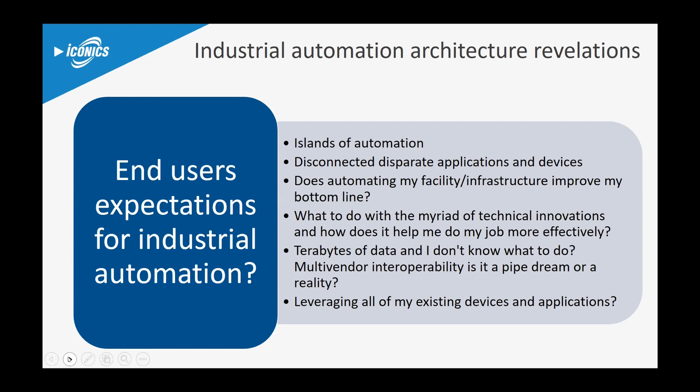Beyond digital transformation, I think about manufacturing overall. We talk about Industry 4.0, and it's important to understand where it came from. The first revolution was the Industrial Revolution, focused on mechanical aspects. The second stage was about doing more automated things, like assembly lines. The third revolution was my favorite - when we started thinking about programmable logic controllers, doing automation in discrete and process through an industrialized computer known as the PLC. The fourth revolution, which has the largest momentum, is essentially what's going on with Industry 4.0 and all the regional equivalents.

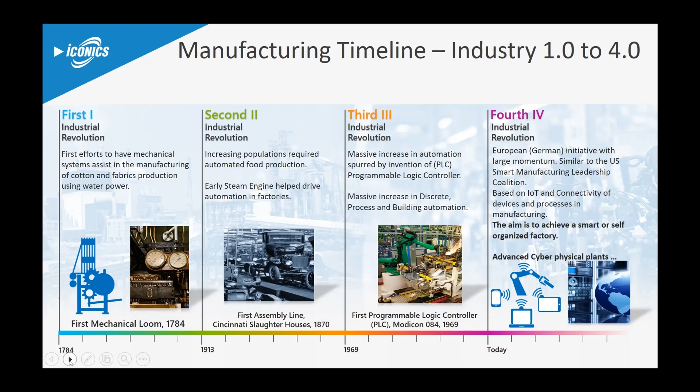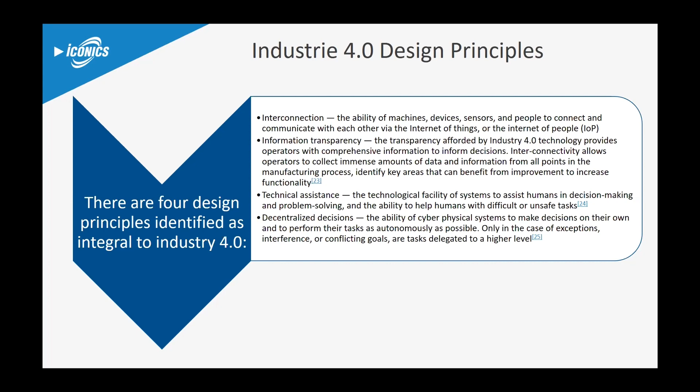The aim of Industry 4.0 and the whole industrial revolution is to achieve a completely smart, self-organized factory. There are basically four design principles that make up Industry 4.0: interconnectivity, information transparency, the ability to have technical assistance helping humans in decision-making and problem-solving, and decentralized decisions - allowing separate cyber-physical systems to make their own decisions, achieving significant automation as we approach IT/OT convergence.

In factories over the years, there's always been a wall between IT and OT. But now IT really needs to get data from OT. What we're seeing is a whole concept focused on IT to OT convergence - the ability to take data from OT and translate it into useful information for the IT world.

There are a lot of things that go on in the OT world - from a connection standpoint, gathering necessary data from all the different devices and applications, then analyzing that data and using great products out there to convert it into what IT people understand to make useful decisions. And it's true that IT, after making those decisions, can push data back down into the OT world.

I'm pleased to have joined Iconics to focus on a lot of the things they've been doing and how Iconics has really been focused on delivering on this whole concept of the Internet of Things - managing devices, how they interact with the cloud, how they leverage all that data to make it useful information, and ultimately get insights to make better decisions and realize the new business value that this connectivity and data can give us.

One significant one I'm pretty excited about is work we've done with a major oil corporation - unfortunately I can't say their name - but they've leveraged all these different components, using OPC UA technology, to take Iconics' respective IoT products and HMI products and consume this data so they can push it up to Azure. This is a significant part of enabling them to have a complete automated process control system.

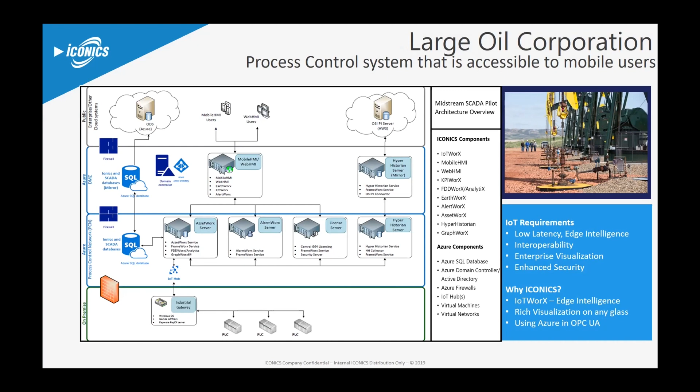So with that, what I'd like to do is turn it over to Jim, who's going to go through a customer success story and provide a good application of how we've been using and deploying digital transformation using both Iconics and Mitsubishi-based products.

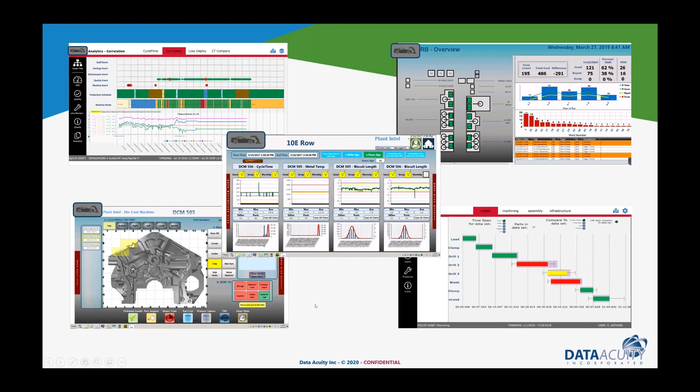So these examples are all in the automotive industry, but we've applied the same data structure, the same data analytics across many different industries. So if you're not in automotive, this certainly applies across many different industries.

The buzzwords manufacturing execution systems and the acronym MES tend to cover a lot of different automation disciplines. This includes OEE, or overall equipment effectiveness, alarm management, asset management, recipe management, product tracking, product genealogy, maintenance tracking, work in process, labor utilization. All of this ends up eventually getting pulled into these kinds of projects where we're analyzing data and looking for efficiency.

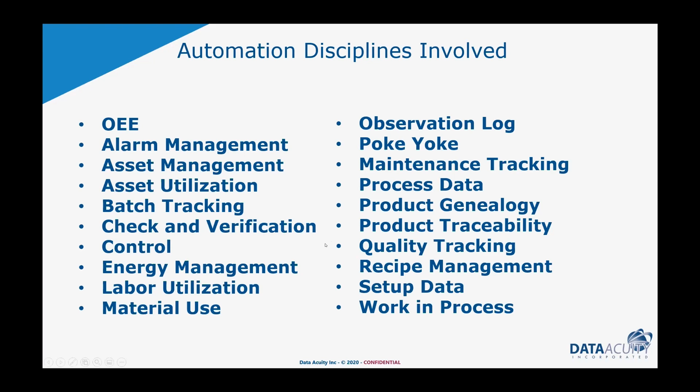For today, we're really going to focus on just a handful of those automation disciplines. We're going to start with how we applied OEE, overall equipment effectiveness. And the reason for that, just about every project starts with OEE, and we come back to it quite often, because that's the tool set, that's the measurement that allows us to focus our resources where their greatest need is.

We're going to talk a little bit about taking data from things like control systems, material use systems, quality tracking systems, maintenance tracking systems, and not just leaving it as data to be visualized, but in fact bringing it all the way to predictive availability, predictive maintenance, predictive quality, predictive material handling, and predictive performance by taking data analytics and bringing it up to predictive awareness. We'll talk about how we did that in some of these projects.

Again, we'll start with OEE, overall equipment effectiveness. The concept for OEE and the principles of how to apply it have been around for a long time. Most of you have probably looked at OEE at some depth. So OEE is availability, performance, and quality as a measurement of how efficient a given piece of equipment is.

Availability is defined as the operating time versus the downtime, and operating time happens to be not a 24-hour clock, but in fact what was the scheduled operating time. Performance is the speed or the quantity of product versus the design rate of a piece of equipment. Again, design rate is a little subject to interpretation, and we'll talk about that in just a second. Quality is good parts versus bad parts. That's pretty straightforward.

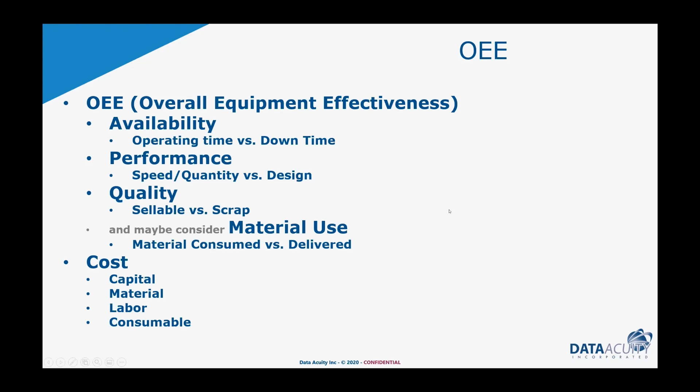If we're going to use OEE as a measurement, as a way to keep us focused on loss of efficiency, it's also important to keep into consideration that in addition to keeping high efficiency, we also want to keep low costs. So I can show you some ways of applying things like capital, material, labor, and consumable costs on top of the efficiency. We're not going to spend a lot of time on that today, but it can be worked into the equation.

So the point of OEE is to bring our attention to the areas of greatest need of efficiency gains immediately. So if you throw a plant map up, OEE is changing the colors of assets or machining centers, in this case, of a given plant. And so our eyes immediately focus on the red machines. These are the machines that are running less efficient than other machines.

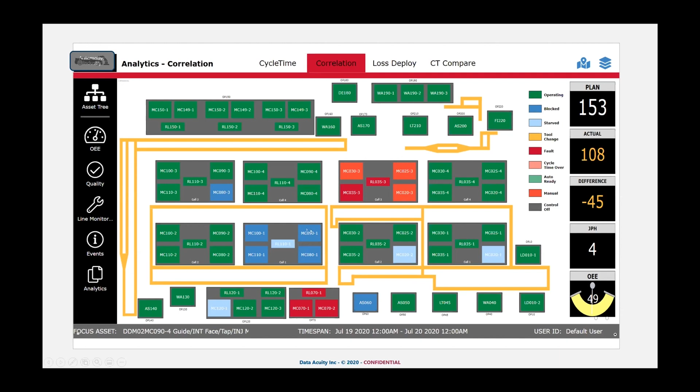And we're scoring each individual machine. But if we want, we could actually score lines of equipment, areas of the plant, entire plants as well, to help us focus our resources down to where we should be trying to gain efficiencies.

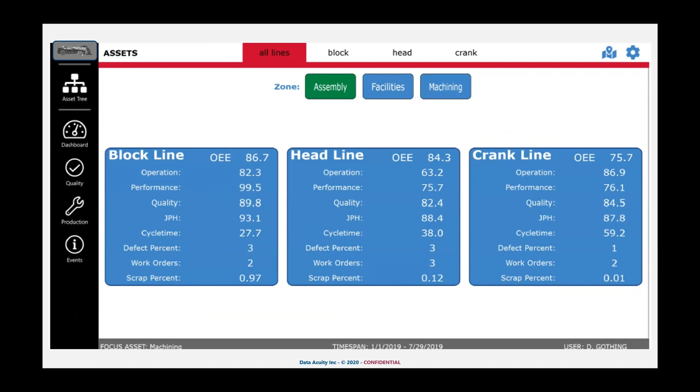The challenge with OEE, and again, OEE is a concept and a measurement that's been around for quite some time. The challenge that we've seen through experience is that quite often it leads to finger pointing within plants.

For example, I define availability as the scheduled operating time versus the downtime. Well, the question always comes up: who determines what the scheduled time was? Production is going to tell you that during break, we shouldn't be scheduled to be running, so don't count that time against us. Maintenance is going to tell you that during preventative maintenance, PMs, changeovers, cleanouts, we shouldn't be counting that as scheduled operating time. Don't count that time against us.

Same thing happens on performance. Who determined what the goal was? Here's the speed of the machine versus the ideal or the goal. Was the goal set by the OEM that built the equipment? Was it set by the engineering department that certified a set of parameters on that machine? Or was it set by the production manager who's taking into consideration things like break time?

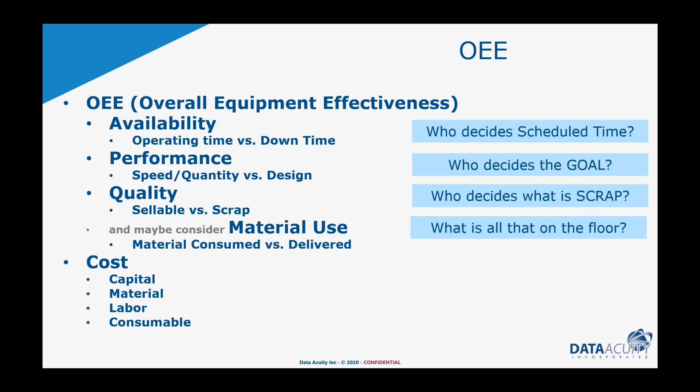And then the same thing will happen on quality. Who determines what is scrap? If you take a part out for destructive testing, is that bad quality or was that a good part? It just can't be sold because it was used for destructive testing or for quality samples. So this often causes finger pointing within a plant. Is our OEE score good or bad because we decided to classify time as scheduled time versus unscheduled time?

What we recommend instead of a straight OEE formula is to use something called a loss deployment approach. What a loss deployment approach does for us is it lets us take the lost opportunity to make a sellable product, and we use the data infrastructure within the tools that we talked about to build this, and actually come up with what was the true opportunity to make a product.

I could have made 1,000 parts today if I ran all the equipment at 100% and never ran out of material and always had an operator. And then we can take the amount of parts we didn't make. Well, I should have made 1,000, but I only made 800. So there's 200 parts that I'm going to deploy across the reasons I didn't make it.

Was it the machine's fault? Was it the process around the machine's fault? Was it because of a required task? Was it an intentional loss? And what I mean by that is machine's fault, well, that's traditional OEE measurement.

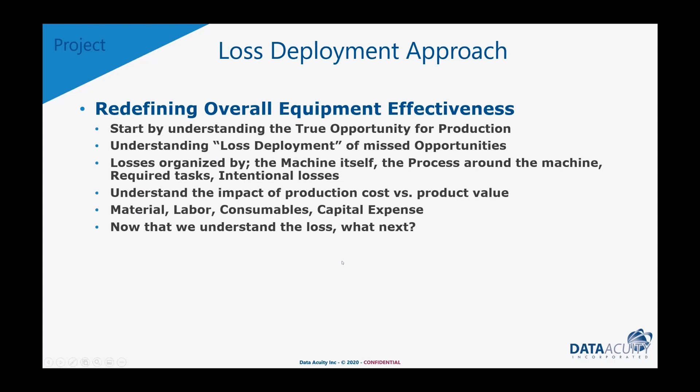The process around the machine, those are the waiting fors. I was waiting for a technician, waiting for material, waiting for instructions. Required tasks are things like preventative maintenance, clean out, changeover. Intentional losses are things like we're not scheduled to run on a Sunday, we don't have any customer orders.

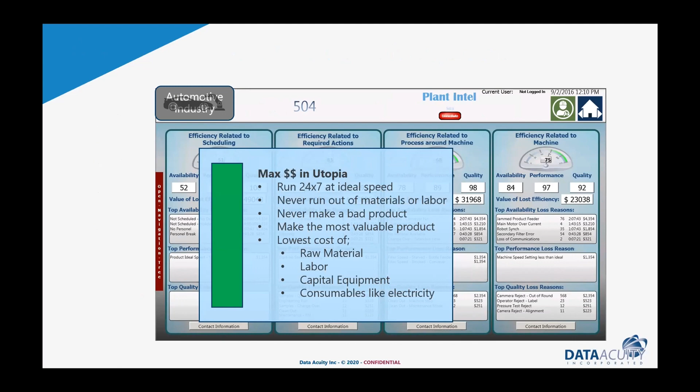So that allows us to take OEE, which is quality, performance, and availability, and instead start from the point of view of how much product could I have made today in utopia. So 24/7, always have an operator, always have raw material, but I didn't make that much. I only made 800, not 1,000.

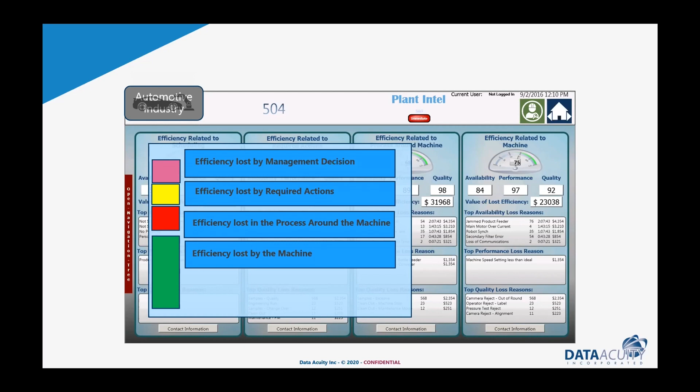So let's show that loss across areas like efficiency lost because of the machine, efficiency lost because of the process around the machine, efficiency lost because of required actions, or efficiency lost because of management. And it allows me to dollarize that, again using the data structure and the tools we've talked about here today.

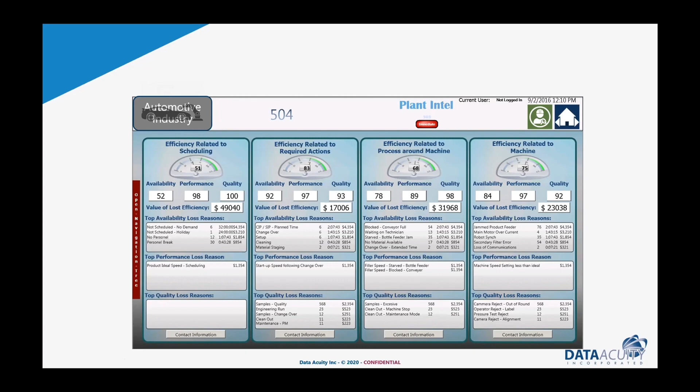It allows me to assign a dollar value to how much money we actually lost because we didn't make sellable product because of the machine. How much money did we not make today because we didn't make sellable product because of the process, the waiting fors? So taking a loss deployment approach on the projects we're talking about today has helped us focus very specifically, not just on the machine efficiency, but on where all of our losses of efficiency are within the plant.

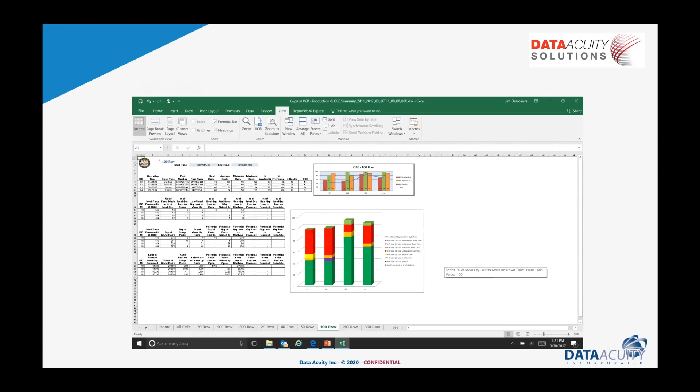Here's a typical report that comes out every morning with the actual dollar cost of not making a sellable product because of the following loss reasons. And this is going to keep us focused.

Okay, so now we're going to move on. So that's starting with OEE. We always come back to OEE - how do we keep focused? How do we keep our resources spending their time on the reasons why we're losing efficiency?

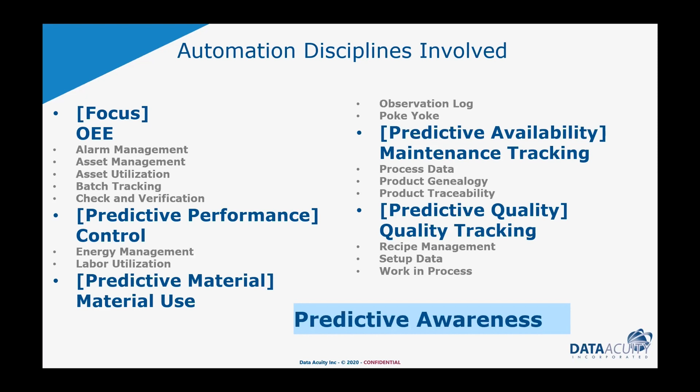Now let's drill into these four other examples of reaching for predictive awareness - not just the presentation of data, not just logging data, but actually using the data to predict where we're going because of the machine properties that are going on right now. To do that, we're going to talk a little bit about this thing called a DIKW model. And this isn't new, this isn't something that Data Acuity came up with. I encourage you to look into the DIKW model a little bit.

Following along with the slides that Tom talked about, we start off today with very cost-effective collection and organization of data throughout our manufacturing plant. Most plants today have ways of taking that data and correlating it so that it becomes information, not just data.

If I take data that was collected and associate it with an asset, a piece of equipment, it's now information. If I take data and associate it with a serial number or a batch number, it's now information, not just data. Associated with a time frame, a shift, a day, a week, it's now information, not just data.

So we want to build data structures using this tool set that allows us to associate the data to make it information. If we take that information and put it in a report, if we apply some kind of sorting or analytics to it, it now becomes knowledge.

And that's where most plants are today. You get reports every morning that take the data associated with a given asset or piece of equipment, plotted on a chart, and it shows up in your inbox every morning as knowledge. This is knowledge of how specific equipment happens to be running.

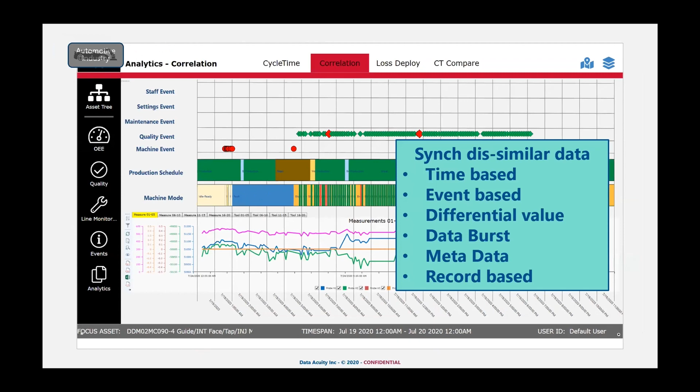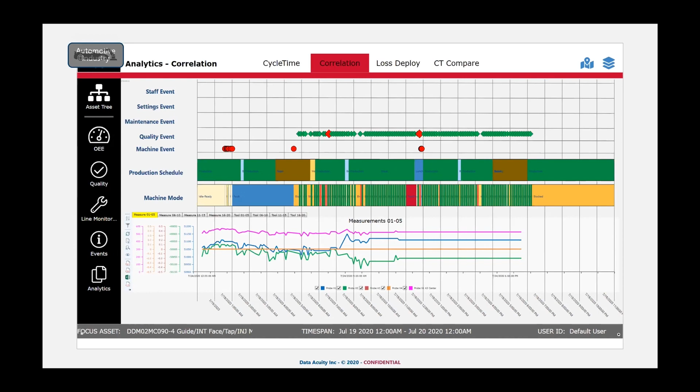So we talked a little bit about data collected from automation systems, from other databases, scheduling systems, CMMS, for example. Some of the data is coming out of operators' and technicians' heads. So it's also important to figure out how we build data structures where people can take what they've observed in their head and, without having to think much, push one, two, three buttons and log for us an event that gets correlated with everything else. When this event happens, we tend to see high torque on this particular motor. So those are examples of predictive maintenance by correlating dissimilar data using the tool set.

This is really good information for a control engineer and industrial engineer to learn how this machine is really working, part by part by part. What's even better is if I could take that set of data and compare it to another set of data. What if I could take that part-to-part timing cycle and compare it to what was the ideal part running on this particular machine?

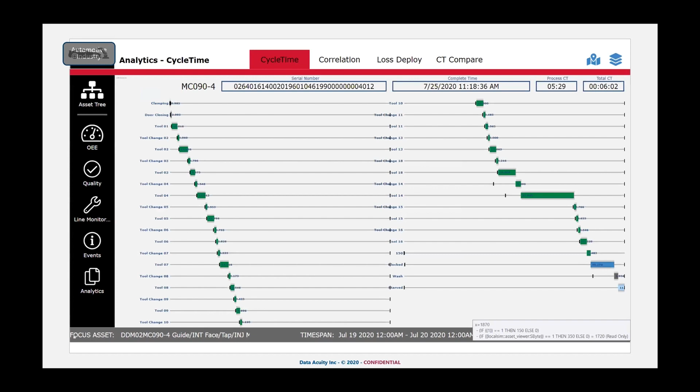What if I ran part A instead of part B, the blue one instead of the red one? What if I looked at machine 7 instead of machine 8? How do they compare against each other? So we've used the tool set to build this timing diagram and put it into data set 1 and data set 2, and the result is we can see what the difference is.

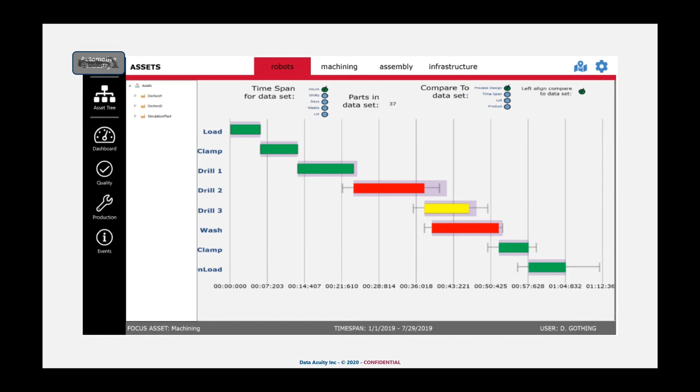We can take a look at how the control system is performing, data set 1 versus data set 2. What was the mean, max, standard deviation differential between data set 1 and data set 2? We can use that to predict what our performance will be when we run the red product instead of the blue product. Can we predict that something different happens? What will our performance be when we're running on machine 7 versus machine 8? That helps us change how we operate machines if they're running different products, or running with different standard humidity within the plant.

The next example I'm going to go through is reaching for predictive quality, trying to build data sets that will predict for us what the resulting quality of a product will be given the parameters. This example happens to be a metal frame for a seat, again, automotive seat.

And the challenge here is there's a whole host of welding robots that assemble this metal structure for a seat. We want to be able to predict when a given welding robot is starting to drift, when it needs a tip change, a changeover, or if it needs to be realigned.

How can we predict that the quality of the product being manufactured might be affected because of the performance of a piece of equipment? The way we're doing that is a combination of operator observations, vision system observations, and measurements that collect information about each and every weld on a given part in front of us right now.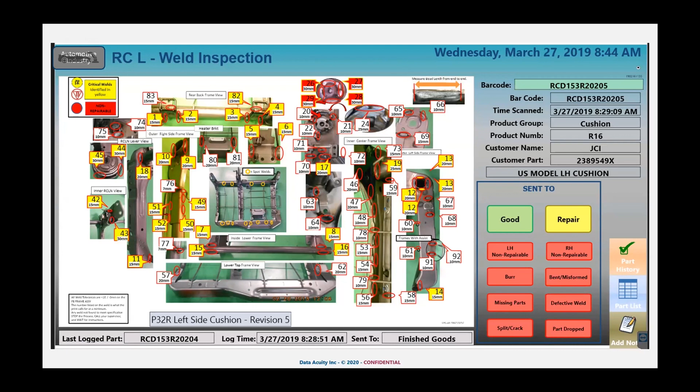So we're correlating what is the design of the part in front of me, what is the information coming out of the vision system, what did the operator observe by visually inspecting it, and coming up with information about which welds are drifting in the wrong direction, which are the good welds, which are the bad welds.

We can then correlate our bad weld and good weld information with when was the last time a tip was changed on the weld, what is the experience level of the operator working that particular line, and what is the model number of the part that's running right now.

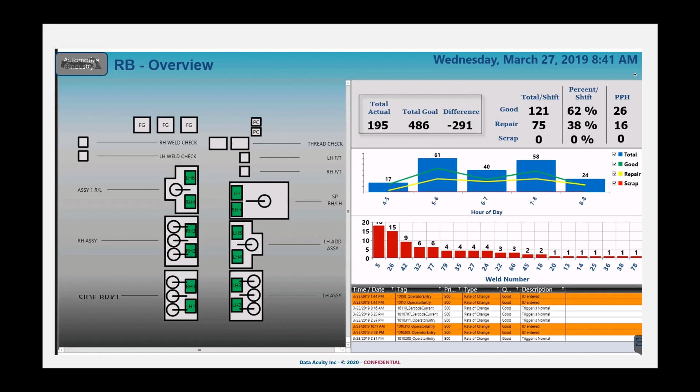So by correlating the Pareto chart of the worst acting welding robots to other events, maintenance records, and experience level of operators, we can predict that if we don't do a tip change within a certain amount of time, we're going to start making bad product. If we don't educate operators with better training, we're going to start making bad product. So we're achieving predictive quality by analyzing the quality and correlating it with other sets of data.

Again, this is a combination of vision inspection systems and operators to come up with what was the problem that happened. In this particular case, a lot of the inspection is happening at a completely different plant from where the part was originally die cast. It's being inspected two or three days later, maybe a week later.

So we're correlating the data that went with the actual quality problem over periods of weeks or days across multiple different plants in order to understand when that particular metal part was cast. If we look at the metal temperature, the biscuit length, or the cycle time of the die closure, we can come up with predictions that when the metal temperature is X, we start to see certain quality problems in this particular area of the part.

When the cycle time of the die closure is Y, we start to see a different kind of problem, a crack instead of porosity, in a different part of the product.

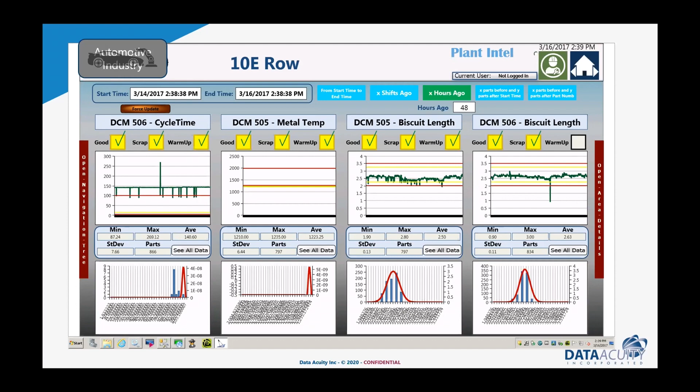We'll talk briefly about applying this concept to a simple thing, material handling, both the delivery of raw material to manufacturing stations and the removal of scrap material from different areas. Once again, by having knowledge of the efficiency of a piece of equipment, what's the rate it's making parts at, and what's the schedule coming forward.

And then comparing that with how often a fork truck brings new material to that particular line, how often it pulls away finished material, how often the scrap bin fills up, we can compare activity of the material handling department, driving fork trucks, emptying bins, delivering raw material, to the actual production going on within the machines themselves, at what speed, with what quality level.

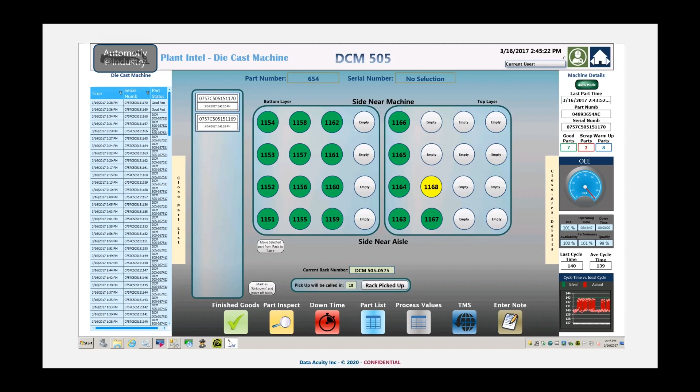And then we can start to schedule. Instead of having a fork truck just drive around the plant, we're going to tell it that it has to be at machine number 5 within the next 15 minutes. It's going to drop off a bin to be filled up, and it's going to empty out the scrap metal bin. That allows us to look at multiple equipment and predict that we're going to have conflicts getting the right material to the right place at a specific time given the production schedule in front of us.

So we're combining live real-time information on the performance of the machine together with records collected from the material handling department, together with production schedules, to then predict where we're going to have conflicts in getting the right equipment to the right place on time to improve efficiency.

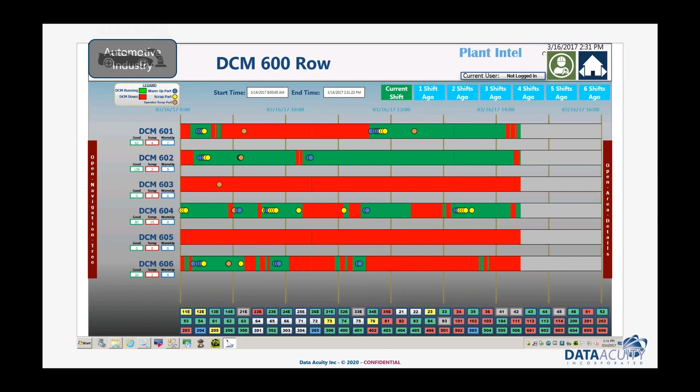So I'm going to finish this with a couple of ideas on best practices for these kinds of projects. They typically start as very small, simple data collection, overall equipment effectiveness monitoring systems, and they often grow to include lots of different disciplines of automation. We use the tool set that Tom talked about because it allows us to start very small and cost efficient, and grow to very complex, powerful data analytic systems.

I tend to recommend that people start from the top of the system and work down. As engineers, we like to solve each individual problem as it comes in front of us. We tend to think about what is the PLC, how much I/O do I have, what network is it on. I recommend we put all of that aside and start from: what is the data we're going to consume? What do the screens look like? What do the reports look like? What are the analytics we're trying to get out of it? What's the predictive awareness we're trying to gain? Start at the very top, and then work our way down to the network, the I/O, the touch points.

So start at 'here's what we're trying to get out of it' first. It's hard for engineers to think that way because we want to solve the problems at the bottom. But we want to start from the top, define the data consumption, define the predictive analytics, and then move down towards the I/O system second.